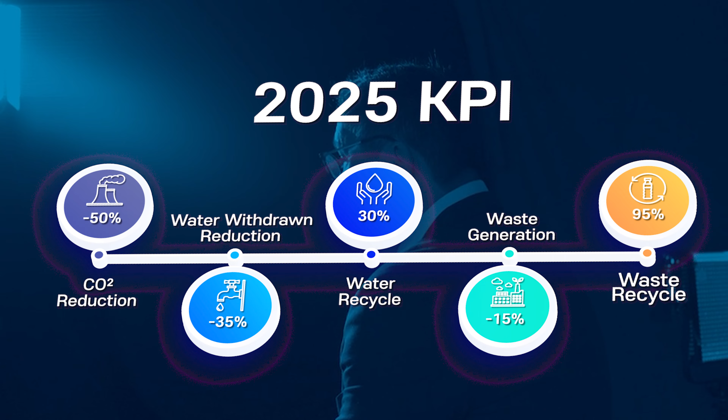The KPIs are carbon neutral by 2030, 50% CO2 reduction, 35% water withdrawn reduction, 30% water recycle, 15% waste generation reduction, and 95% waste recycle by 2025.

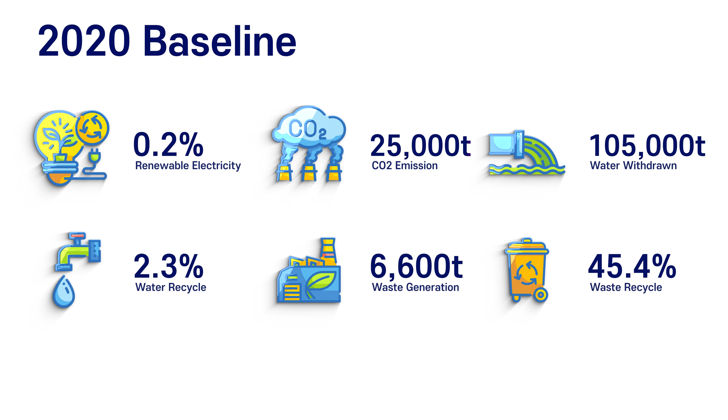ESG of Sachon factory in 2020 was insignificant: 0.2% renewable electricity, 25,000 tons CO2, 105,000 tons water withdrawn, 2.3% water recycle, 6,600 tons waste generation, and 45.4% waste recycle. To break through the challenge, Sachon factory established a glide path and took off on its ESG journey.

to become the ESG flagship factory. Sachon factory's ESG journey started with loss analysis, followed by Enercon DMS, energy audit, behavior change, blue sky ideas, and third-party consulting.

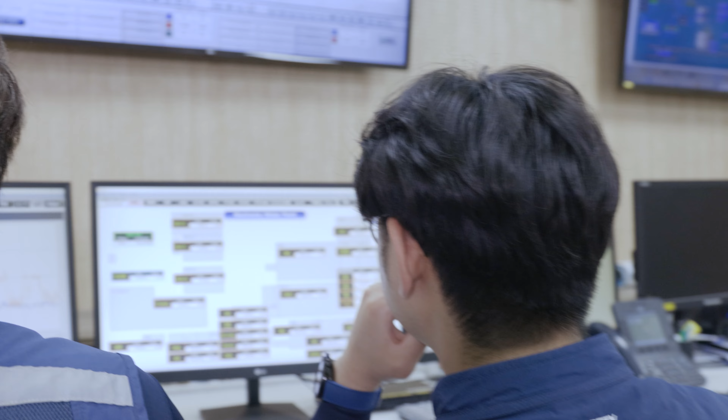Enercon DMS and a campaign to drive total involvement were at the center of the achievement. Data analysis on EMS was used to monitor energy consumption trends and the accuracy of the data, with additional data analysis to monitor special occasions and prepare reports. Reports were sent to all employees to promote total involvement by sharing energy data and energy inspection results.

Enercon DDS was used to share energy trends with the team and track and trace improvements and challenges. Plant DDS shared the energy data with the whole plant, and energy inspections checked for energy leakage or overuse. The most well-cooperated department is awarded the Best CO2 Diet Award, with the slogan 'Little Action, Big Change.'

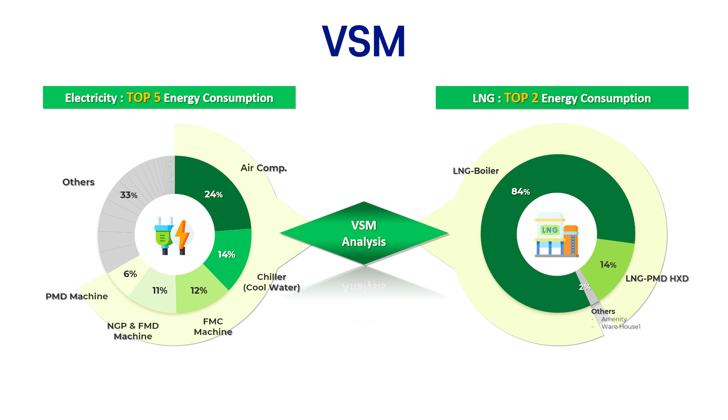We conducted VSM for CO2 and renewable electricity. The top 5 electricity consumption and top 2 LNG consumption sources were identified. A master plan was established based on the VSM, and the ESG team started taking action.

Renewable electricity: the roof solar panel generates 1,660 megawatts annually, reducing 786 tons of CO2. The parking area solar panel generates 874 megawatts annually, reducing 414 tons of CO2. The empty area solar panel generates 1,273 megawatts annually, reducing 563 tons of CO2.

In terms of REC, we identified a supplier to procure REC at the lowest price. At this moment, there is no legal grounds for a virtual PPA. When possible, we will take action promptly.

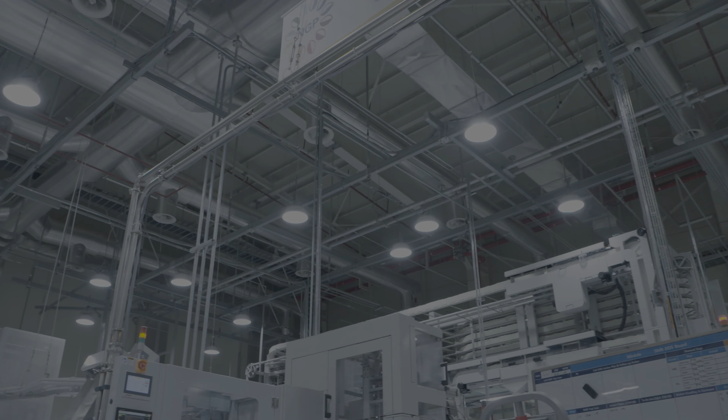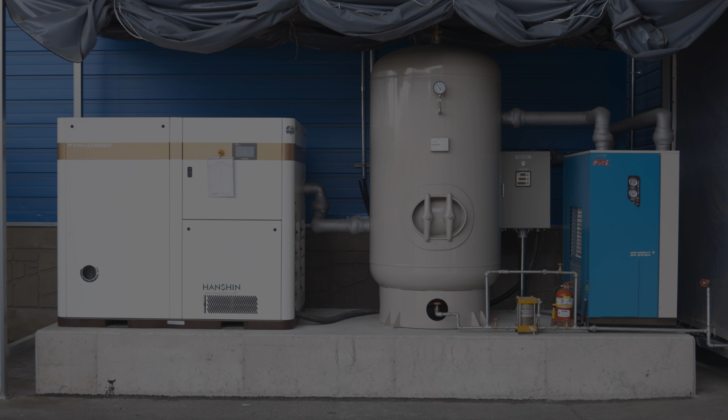CO2: LED lights replacement reduces 638 tons of CO2 annually. Condensing boiler replacement reduces 199 tons annually. Steam pipeline insulation reduces 201 tons annually. Compressor innovation reduces 492 tons annually. Wood pellet steam boiler reduces 3,000 tons annually.

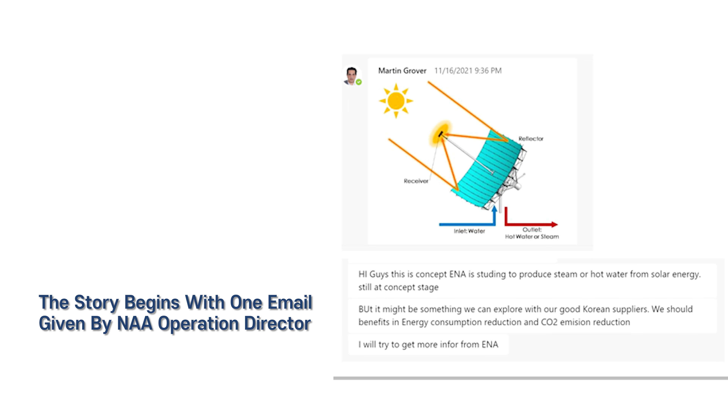The story begins with one email given by NAA Operation Director Martin Grover. Based on the suggested idea, Sachon signed an MOU with a national university for further study. After a few months of cooperation, we successfully identified a supplier who could meet our demand. Sachon Factory signed an MOU with the supplier for a demonstration of the new technology.

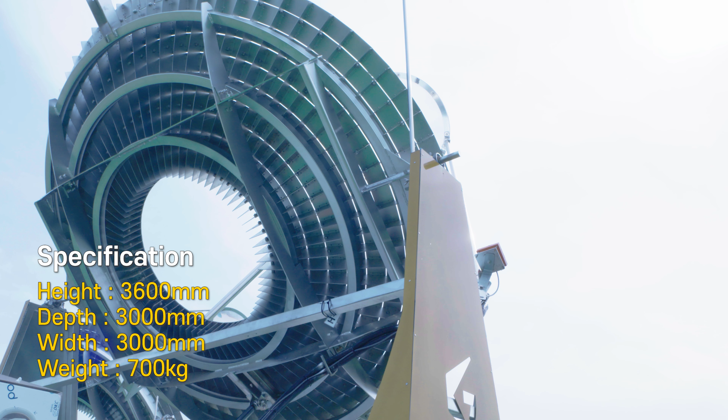This system concentrates solar power up to 1500 degrees and produces 300 to 500 degree heat medium oil, which meets with water to produce steam and hot water.

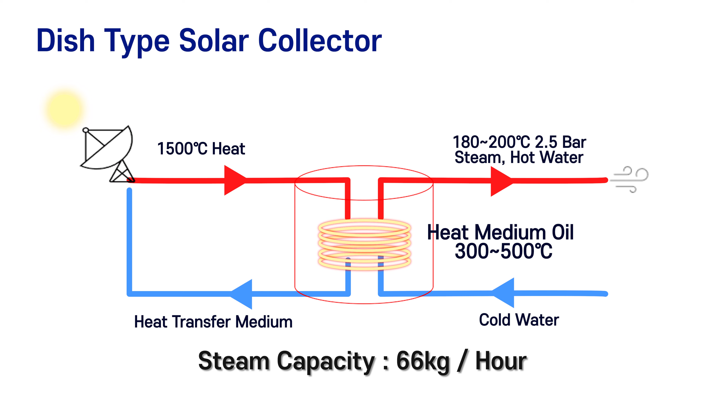We conducted VSM for water withdrawn and water recycle. The top 4 water consumption sources were identified, and the ESG team started taking action.

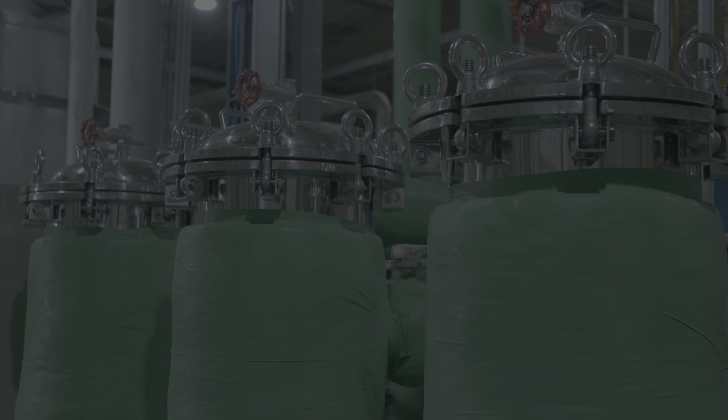In the beginning, 100% of water consumption was supplied with city water. In 2020, we installed reverse osmosis water recycle technology. The pore control filter removes 10 to 1000 micrometer foreign objects. The microfilter removes 0.1 to 10 micrometer foreign objects. The RO filter removes down to 10 to the negative 5th power micrometer ions. This technology can recycle 130 tons of water per day.

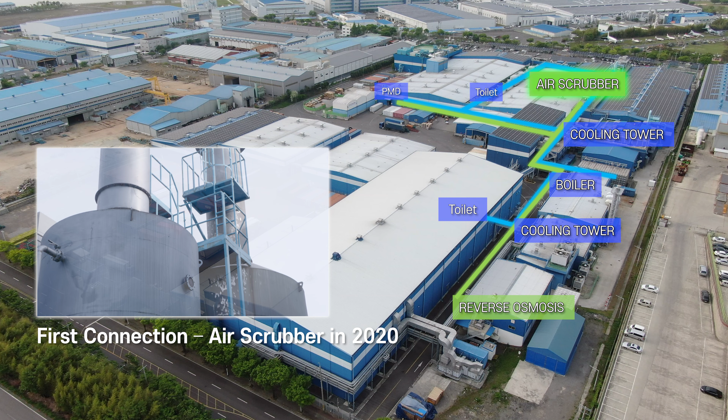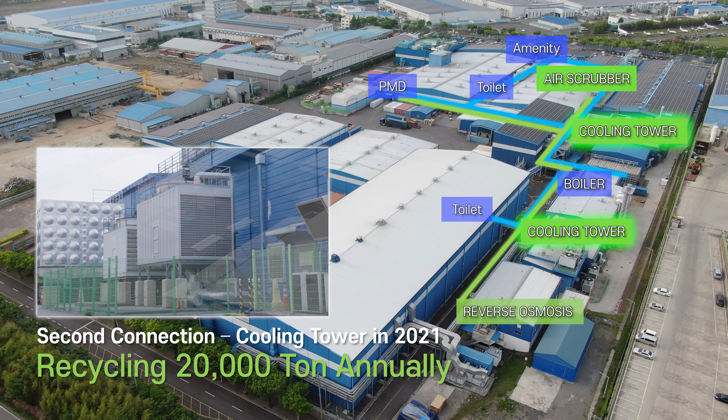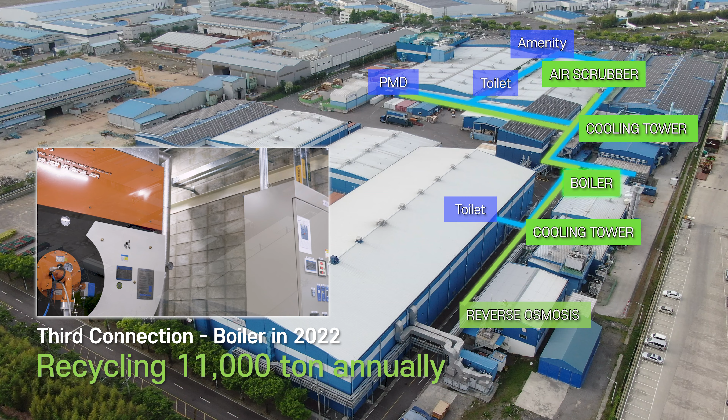The first connection was the air scrubber in 2020, recycling 15,000 tons annually. The second connection was the cooling tower in 2021, recycling 20,000 tons annually. The third connection was the boiler in 2022, recycling 11,000 tons annually. The last connection is PMD in 2022, recycling 8,000 tons annually.

Apart from water recycle, to reduce water consumption, water-saving type toilets were installed, reducing water withdrawn by 8,600 tons annually. In addition, to enhance responsible management of water, Sachon Factory acquired Alliance for Water Stewardship certification in 2021. To achieve the certification, we prepared 70 documents and established relationships with 17 different water-related stakeholders, including government organizations.

To tackle waste, Sachon Factory initiated Project Shurik. The Shurik team conducted process-level VSM, developed a master plan, and started taking action.

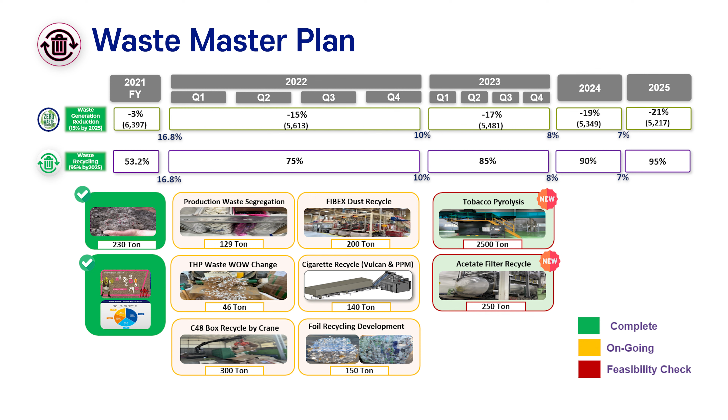Sludge fed to earthworms recycles 230 tons annually. C48 box segregation by crane recycles 300 tons annually. FIBEX dust recycling recycles 200 tons annually. Vulcan ppm recycling recycles 140 tons annually. Foil recycling at the construction site recycles 150 tons annually.

THP disposal by shredding machine reduces 46 tons annually. Waste segregation on the production floor recycles 129 tons annually.

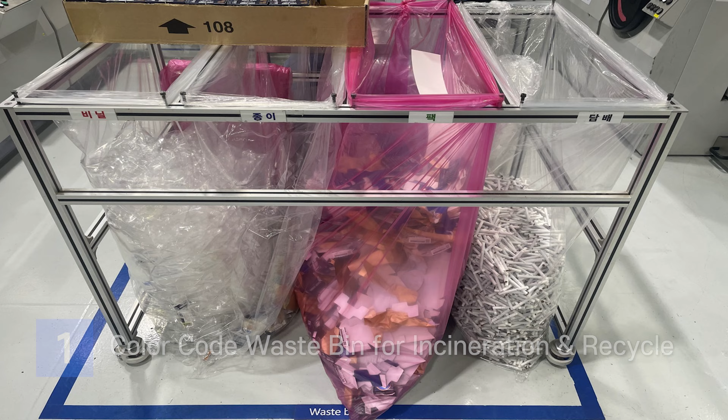To segregate waste perfectly, there are 3 processes: 1. Color-coded waste bins for incineration and recycling. 2. Pressing by waste bin colors. 3. Additional segregation by a third party.

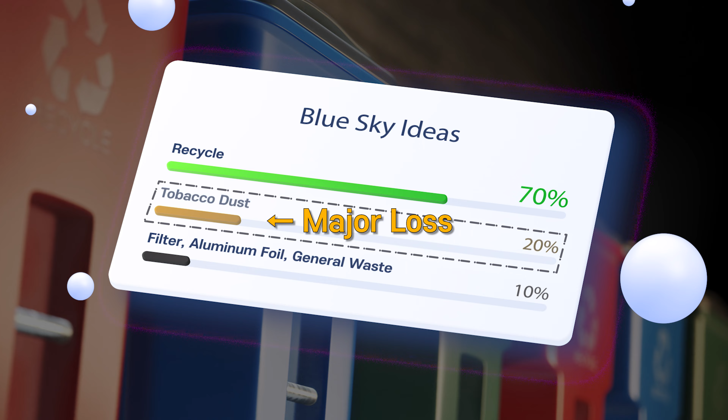After taking these actions, we achieved a 70% waste recycle rate. Our team then conducted additional VSM for the remaining 30% non-recyclable waste. Out of that 30%, 20% was tobacco dust.

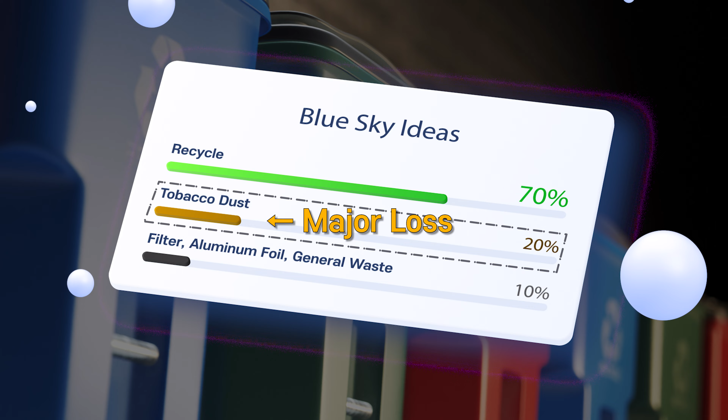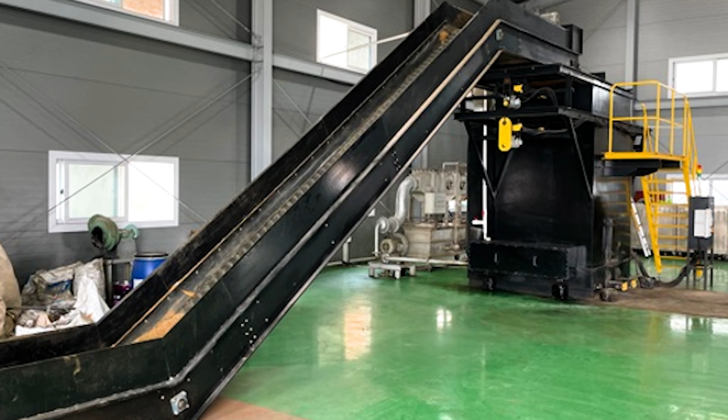To recycle tobacco dust, our team started exploring blue sky ideas: 1. Using it for concrete production material. 2. Organic fertilizer. 3. Food waste disposal. All of these failed. Hence, we started exploring a new concept: pyrolysis technology.

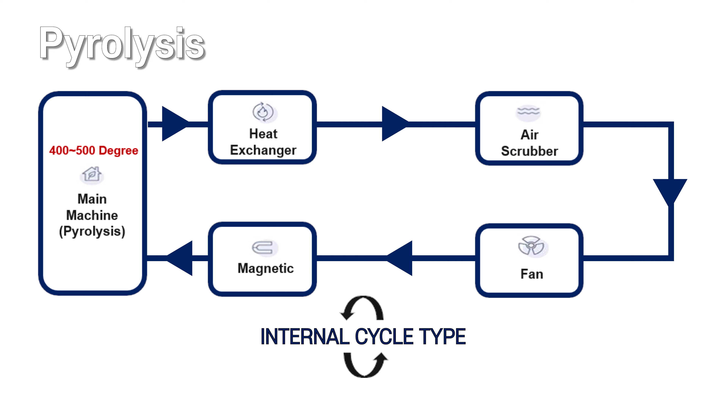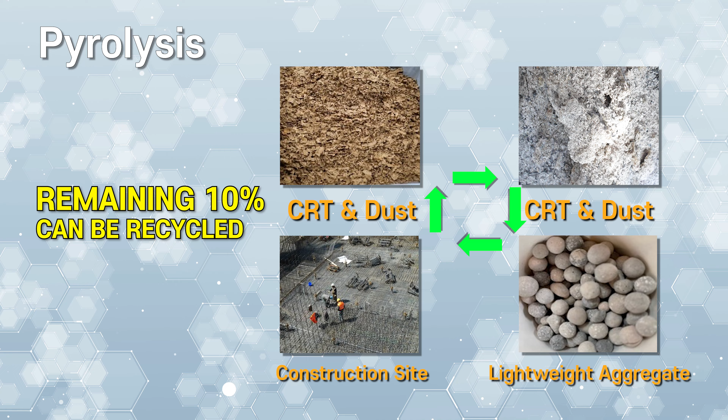The pyrolysis machine uses 400 to 500 degrees of heat with a closed loop system. The machine reduces the volume of waste by 90%. The remaining waste is turned into lightweight aggregates and used at construction sites.

The impacts are tremendous. 3,200 tons of CO2 is equivalent to 485,000 pine trees. 6,750 megawatts of electricity is equivalent to the electricity consumption of 2,000 houses for one year.

26,500 tons of water is equivalent to 10.5 Olympic swimming pools. 965 tons of waste is equivalent to 21 40-foot containers.

We challenge because it's difficult. Number 1 ESG flagship factory, BAT, Sacheon Factory.